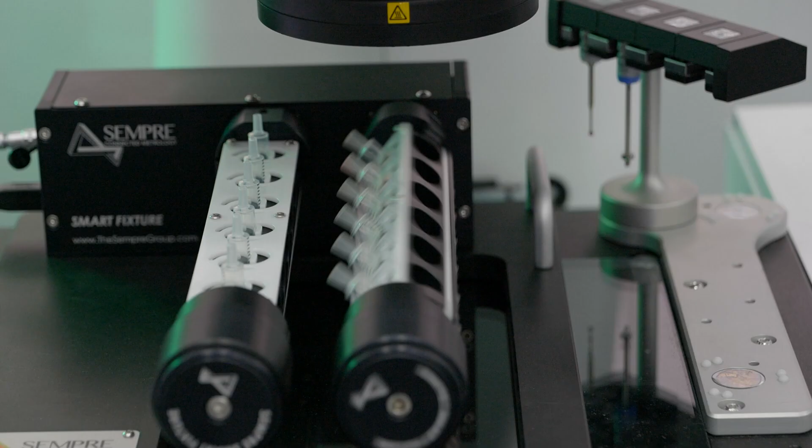Hi, I'm Mike. I am Head of Technical Delivery here at Sempre. The Sempre Group is an independent provider of metrology services and products to industries like aerospace, medical and automotive.

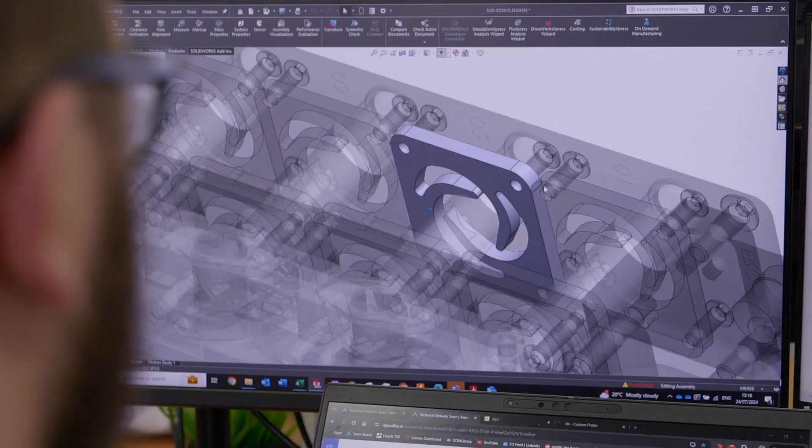At Sempre, we're trying to improve the productivity of our customers and British manufacturing in general, and we tend to look at the outcome of what the problem is rather than the system or the product. So we employ a team of professional engineers and salespeople to help you identify the problem and to solve it with our solutions.

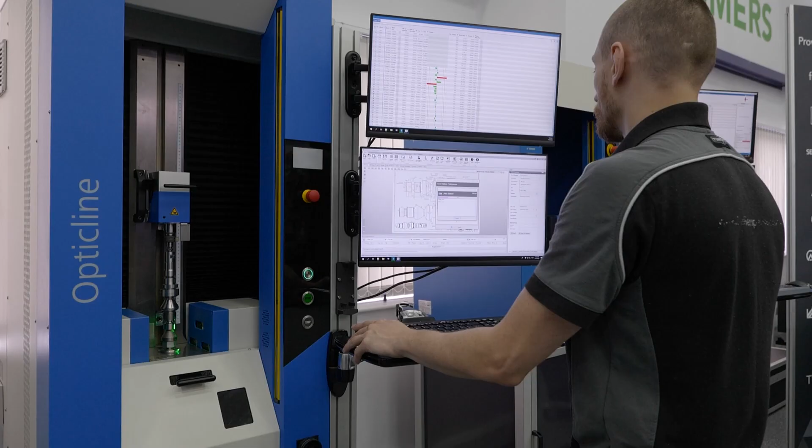We're seeing a lot more demand from our customers that they need to integrate automated solutions into their shop floor practice. Automation can be quite a tricky thing to bring in, so we're bringing that expertise for our customers, particularly around quality control, metrology and inspection.

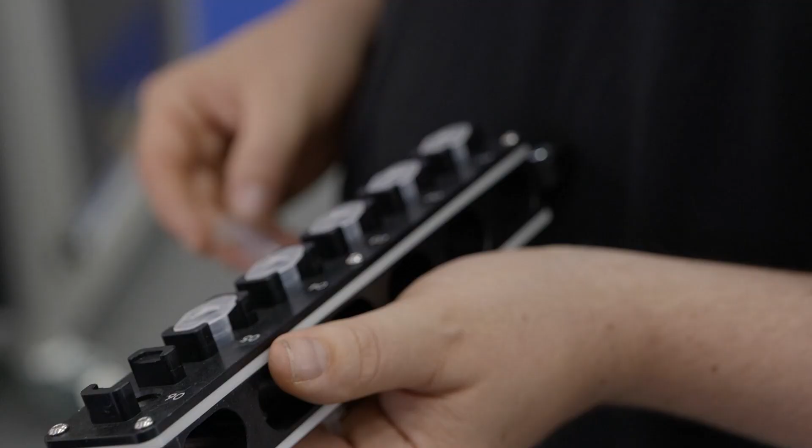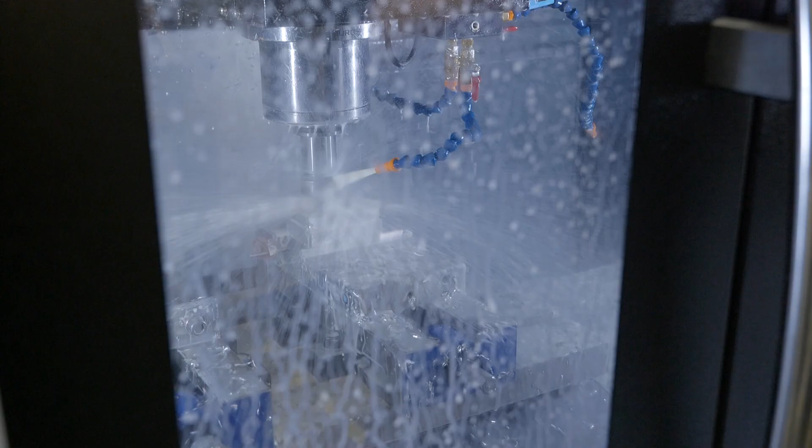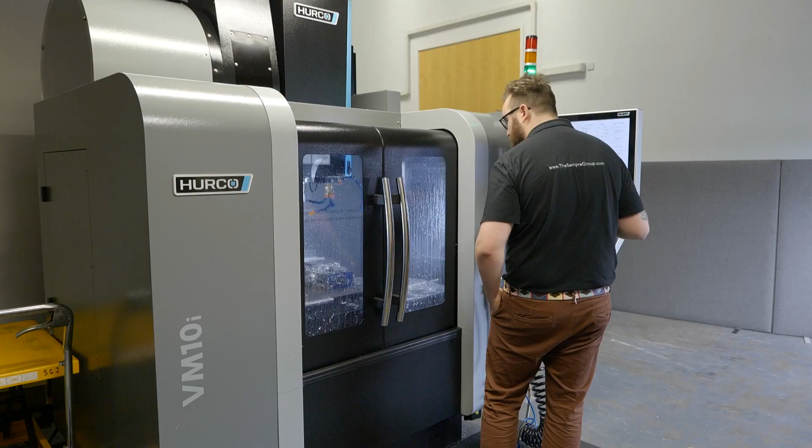A lot of our customers are starting to recognize the importance of fixturing within their quality process. This is a very key aspect of traceable, reproducible and repeatable measurements on the shop floor. To support that, Sempre design, manufacture, build, test and program all of our fixtures in-house for all of our customers. And to support the growing need for this to our customer base, we've invested in a milling machine to help us produce our components faster and also to give us the flexibility that we need within that process.

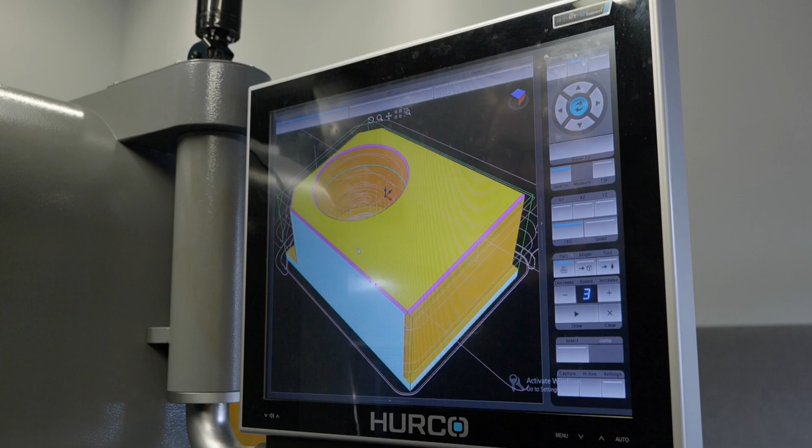When we took the decision to explore bringing in a milling machine, we looked at a number of different providers, and the thing that we were really keen on was, number one, making an investment which is financially viable. It wasn't too expensive, and it gives us the capability to do everything that we need to do in the right materials, in the right accuracies.

But there was another aspect as well, in the sense that Hurco also supported that process by de-risking us. They gave us the offer to do a financial agreement over a set of months. So instead of us taking a massive leap into the world of milling, we were allowed to dip our toe a little bit beforehand, and that really helped oil the wheels of that process to bring it in.

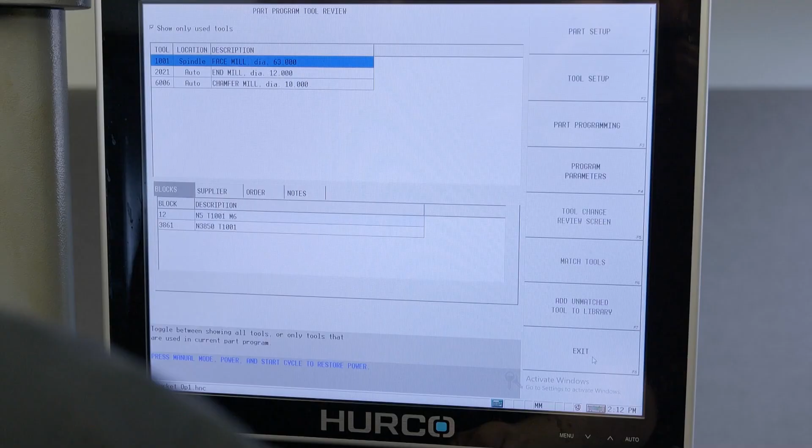Since then, really, we've kind of taken it and we've flown with it. So the whole process of bringing the machine in from a commercial point of view was really, really helpful. And then from there, it was actually more of a team effort from lots of different places.

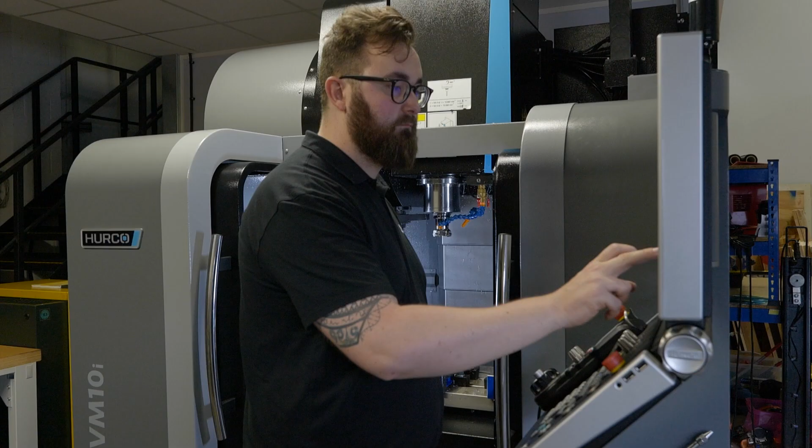Hurco provided some great support and training on how to use the machine, at their facility, and that was really, really good. We then had a lot of support around us from tooling suppliers, tooling representatives, and also the great big YouTube world that allowed us to explore this as well.

We are not machinists, that wasn't our background, but through this process, we've been able to really break the back of that and to have a fantastic experience of what we do.

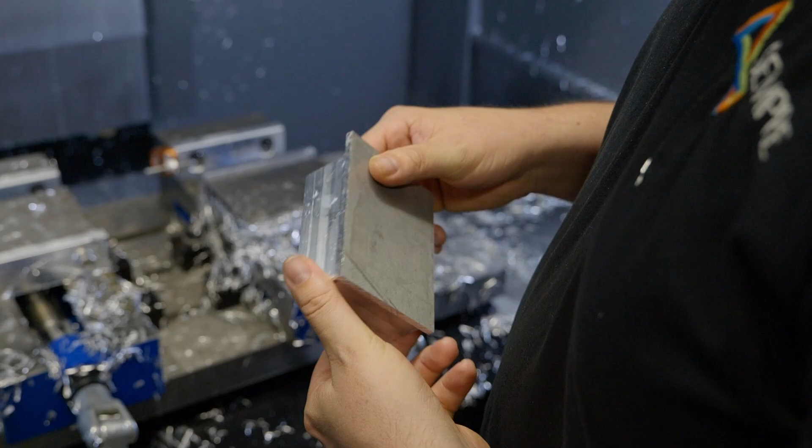So we went to High Wycombe, I think it was a 3-day course. Me and one of my colleagues went down there. We did the full conversational programming course, which then followed up with how to actually use the machine, how to set tools, how to correctly use the machine in daily life.

I really can't fault it. It was a really easy, seamless process. The trainer was great, and by the end of it we came out absolutely chomping at the bit to get to the machine to try and make some parts.

And that's really when the real learning kind of started, because we had the training, that's great, and then we start to utilize that training on the machine - that's where the challenge started. But we came through that eventually, and now it's great.

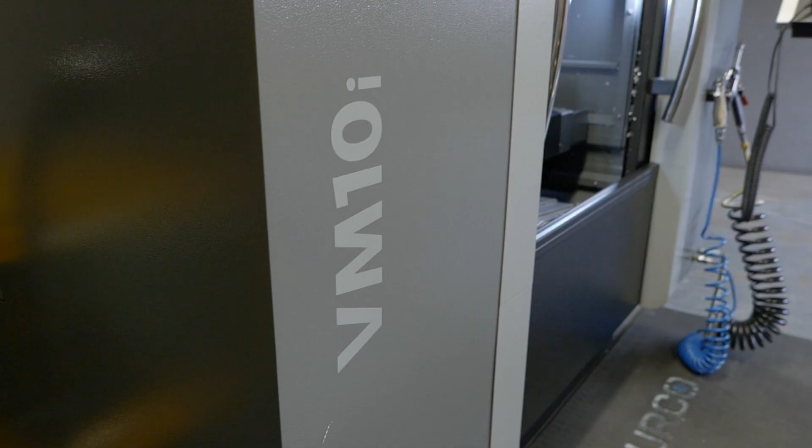The VM10i was the ideal machine for us. It had the right capacity in terms of size, it had the right capability in terms of the speeds and feeds that it was able to do with the materials that we wanted to do, and it was at the right price point for us, so it kind of nestled in that trifecta.

We are mainly doing aluminium, stainless steel, engineering plastics, so nothing necessarily exotic, but we still need to make sure they are accurate, they look good, and we can do it repeatably and reliably. So that machine really fit into that pot really, really nicely.

And through the conversations with Hurco during that process with the accessories, we know that we can also upgrade it should we need to in the future. So having the Hurco at Sempre will really allow us going forward to support our customers better with turnkey solutions like fixturing, developing products like smart fixtures, R&D development of other products that we might do to support all of our customers' needs going forward.